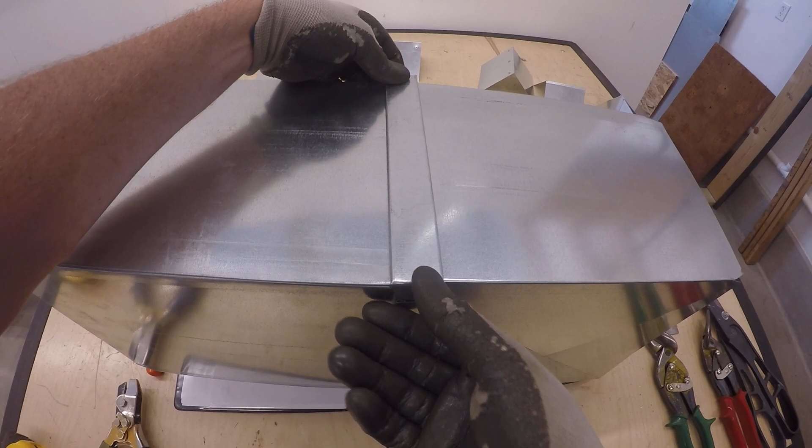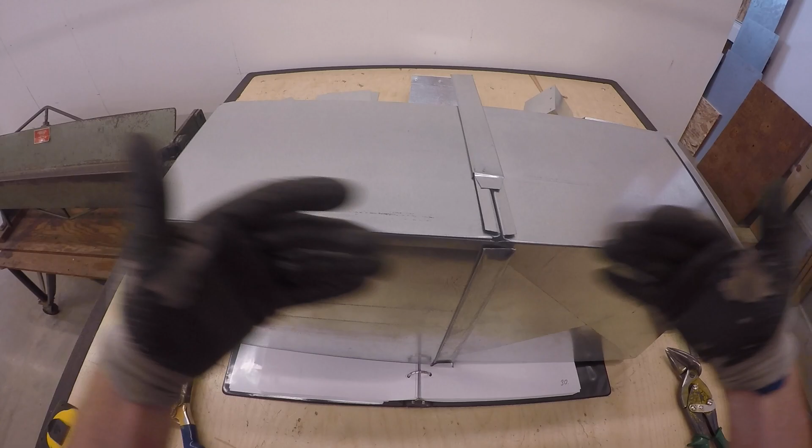So if you can see that back there, we've got an 8-inch tall duct and a drive cleat that forms the two edges and connects and locks them together. If I slide it over and pull it apart, we can bend these corners up and slide that down, provided it doesn't get hooked by anything, and it just slides off on the other end. If I spin it around, the two bent edges of the two pieces of duct connect with our S cleat here as well. So this part I'm moving is what we're going to be fabricating up today.

So let's get on with it. Here we go. Job 7 is building the drive cleat. It says study the instructions per plate 1 on the next page.

We're going to make our drives to fit an 8-inch long duct, and it also states that the drives should be at least 1.5 inches longer than the height of the duct. So if it's an 8, we need to make it 9.5 inches long, and that's what we've got lined up for the next piece.

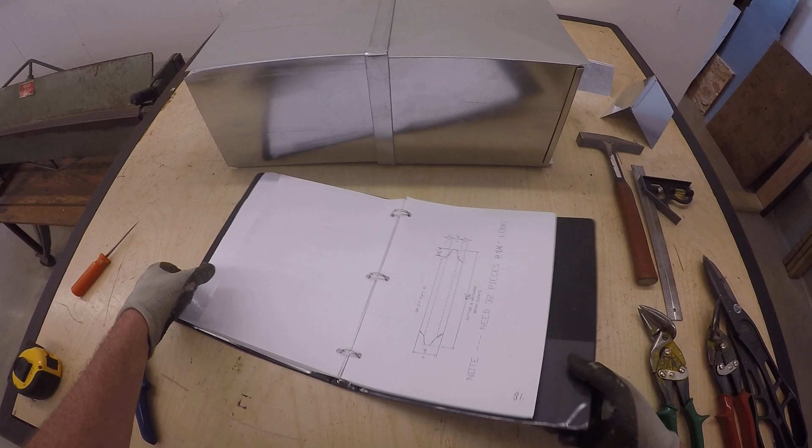Looking at the next page, you can see they've got the main portion or the main plan for the drive cleat laid out here. A lot of this part can be done using just a notcher and a scribe, so we're going to do that first.

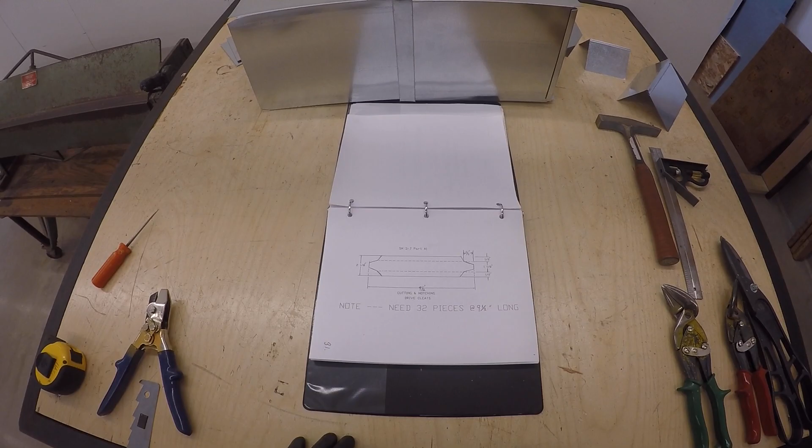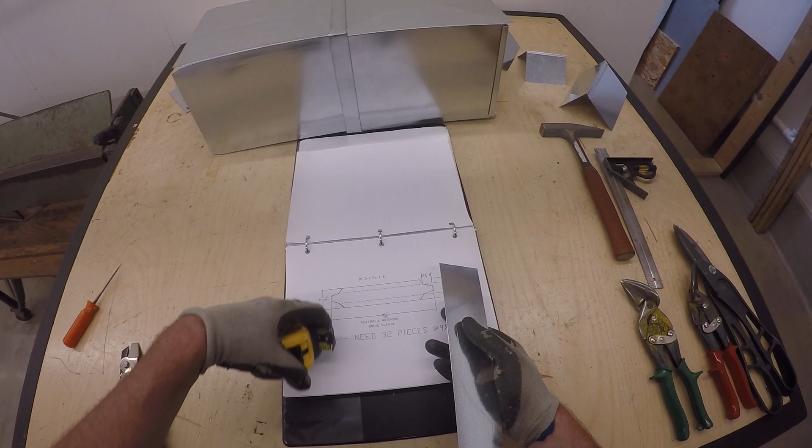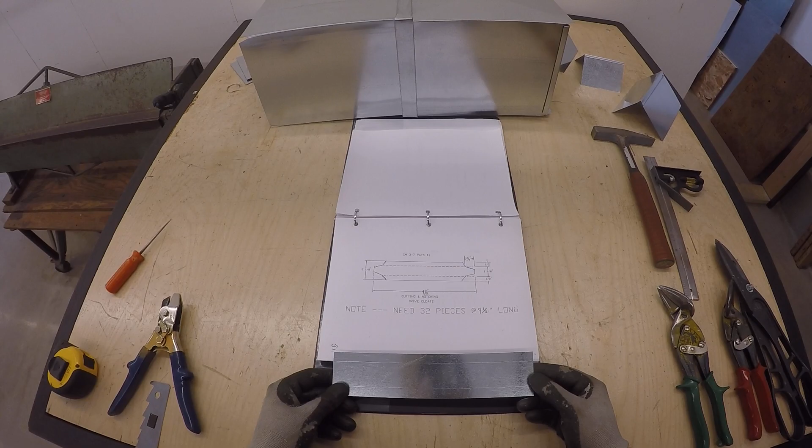First things first, we've got to get our part. We measured the length at 9.5 inches and 2.125 inches in width to complete this piece. I only cut one — for the entire project, you need at least 32 pieces, 9.5 inches long, but they can also be made in the machine or purchased down the road. So we're just starting with one for now.

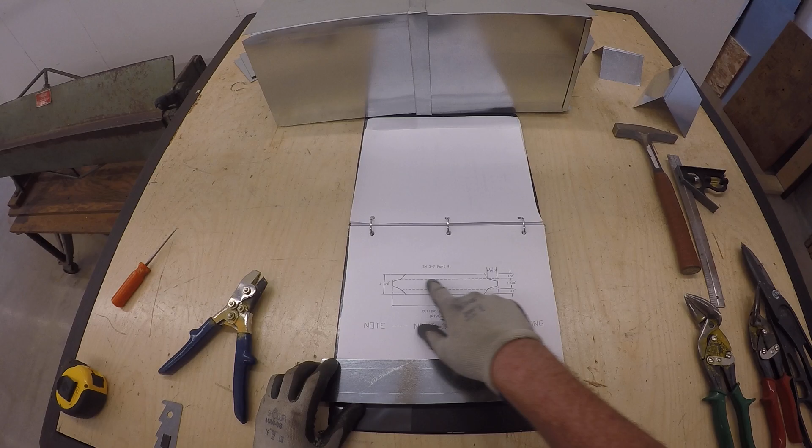To complete this, looking at our plans, we need 1/2 inch marks to indicate where the bend line has to be, which we'll do in the apron brake. Then it wants a notch 3/4 inch in and 1/2 inch down at those center points on all 4 corners. So let's do that now.

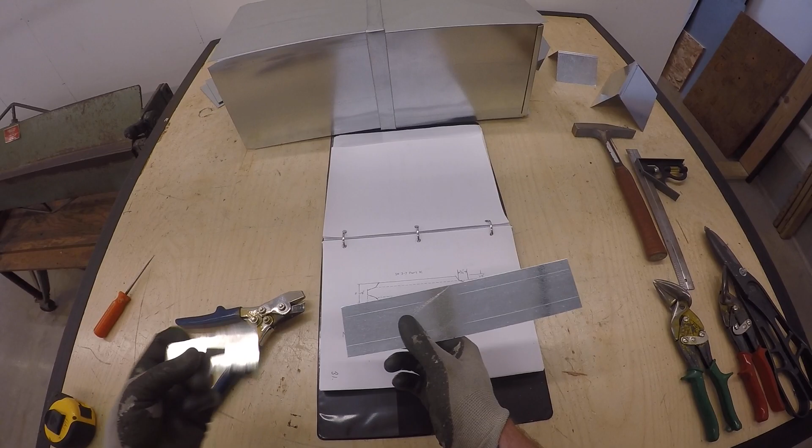So I've already marked the 1/2 inch width on the table using the scribe, just running it along the edges on both sides to come up with that using that tool.

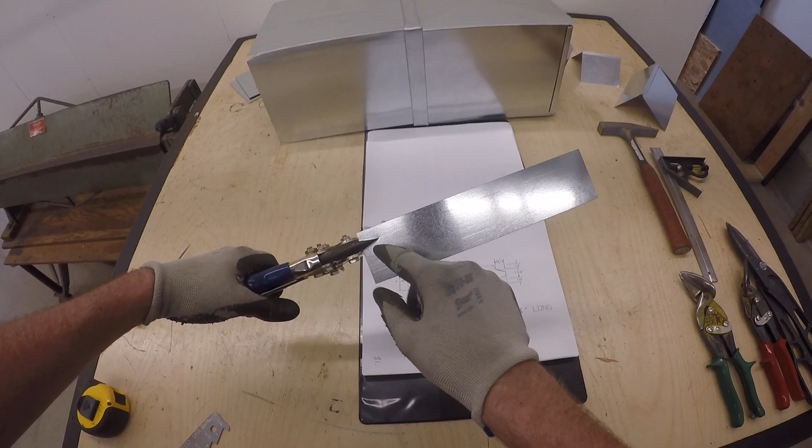Here I have my 3/4 inch notcher. This one's by Malco — there are others, Hillmore's got them, and everybody's got them. You just put it right on your 1/2 inch mark with the center of the tip, squeeze that off, and it pops out that section.

We'll do the same again on the other 1/2 inch mark, then flip this piece over and do it with the 4th one as well, just like that.

Now we've got a piece that looks similar to that — we've got our starting function. All we have to do now is knock off the edges. Some people prefer more of an angle or less of an angle, depending on how you look at it, on how they cut that off so it connects to their bent drive on the other piece of duct. It really doesn't matter to me — I can fabricate them in the field as well if needed.

If I go something like this, I think that would be a little bit short, so I just use my notcher and bottom it out on both corners and pop that out. Some people like them steeper, some people like them less — makes no difference to me, since we'll be taping the joints when we're done for sealing purposes, as long as they stay in place. So we just go around all 4 corners like that and notch them out.

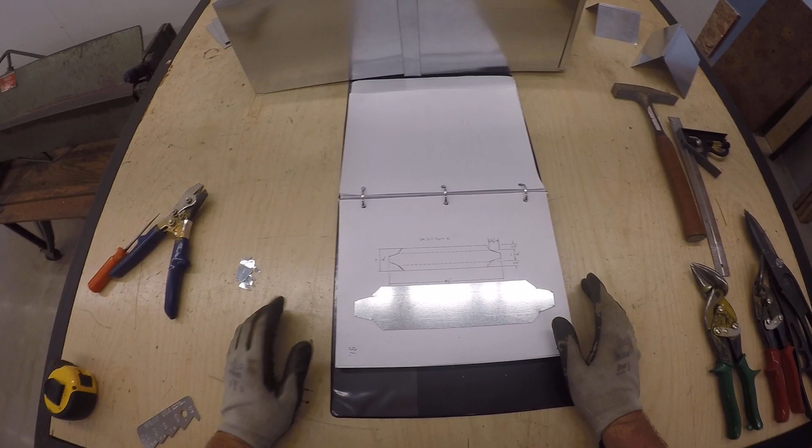It kind of makes a mess, so try to keep it all cleaned up. So if we look at our plan, we now have everything cut out and notched as it should be. Let's go on to the next page and get into the bending portion of this project.

Basically what they're showing here is an exploded view of the edge — we're going to take the 1/2 inch edge and roll that over in our apron brake, and we should have approximately 1 5/8 remaining. Let me slide this out so we can read it. So if I set it right on the inch, it should come out to 1 5/8, and it does. So that works out.

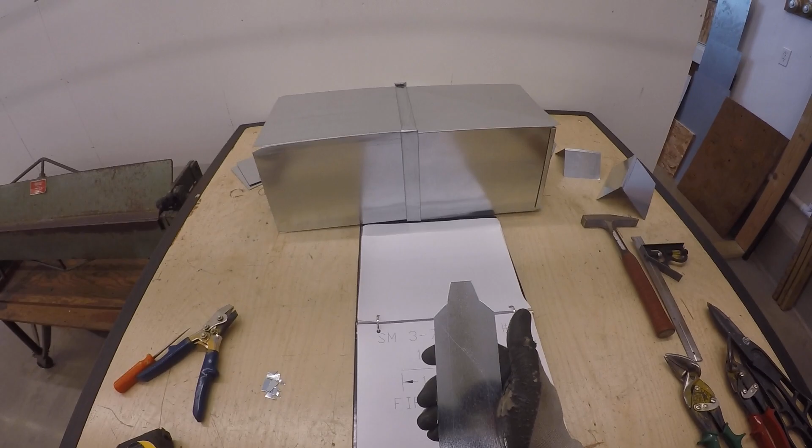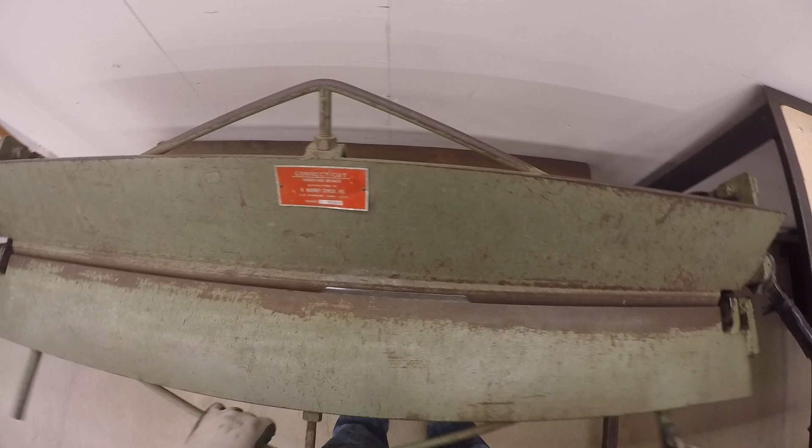Let's go ahead and go over to the apron brake and put that first bend on it. If you recall, in the previous project I had some issues with that Pittsburgh seam not being tightened up, so I did adjust it. It's better, not perfect yet. I found out this brake has had some fabrication done to it, and there's no adjustment left on the right side because they happened to weld it, unfortunately. So currently we're close, but it needs to be closed down, not 100% tight.

It has to have enough room in there to slide another piece of sheet metal inside of it. So on that second bend, after we bend that, I'll slide it back down here on the edge. We're not going to pull that 100% tight, just bring it down so it's within about an 1/8 inch or a 1/16 of an inch from being closed there, maybe a little further yet.

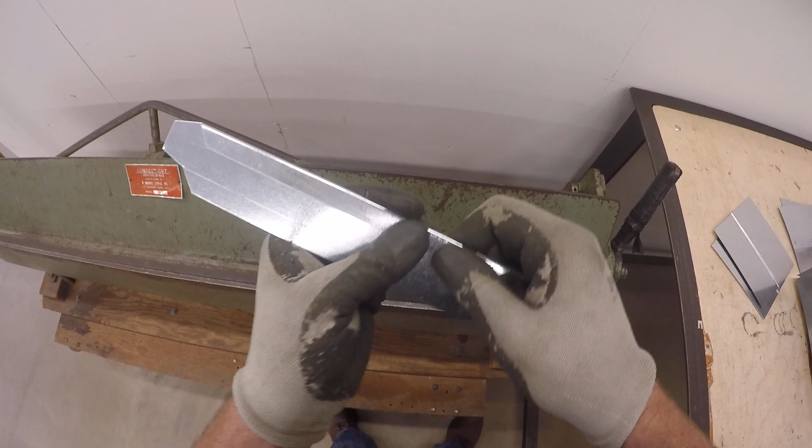And that's not too bad, that's pretty decent. The brake can use some help yet on that. Maybe this end will be a little bit better. Sorry about that, and that kind of made that nicer.

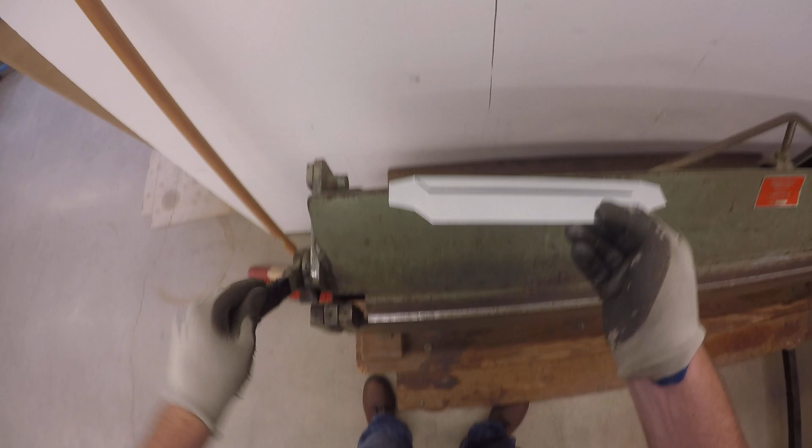So now let's go back to our plan so you're following along here. There's your exploded view with that first bend. Let's go on to the next page. It shows the second bend, and we're basically going to perform the same result in the other direction with the 1 1/8 left over. So let's go ahead and do that now.

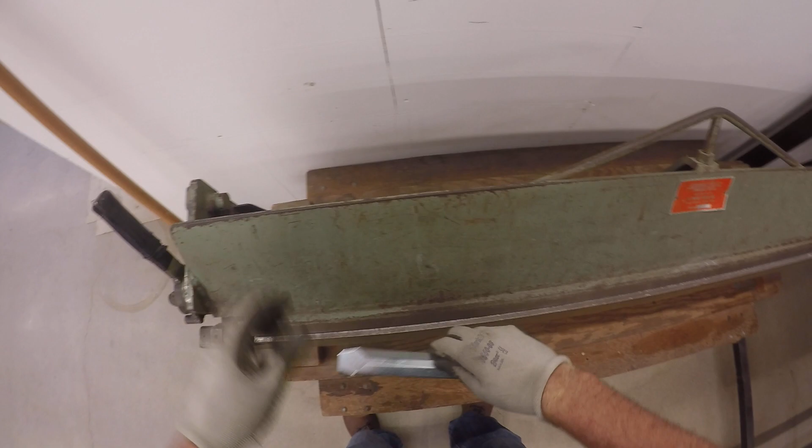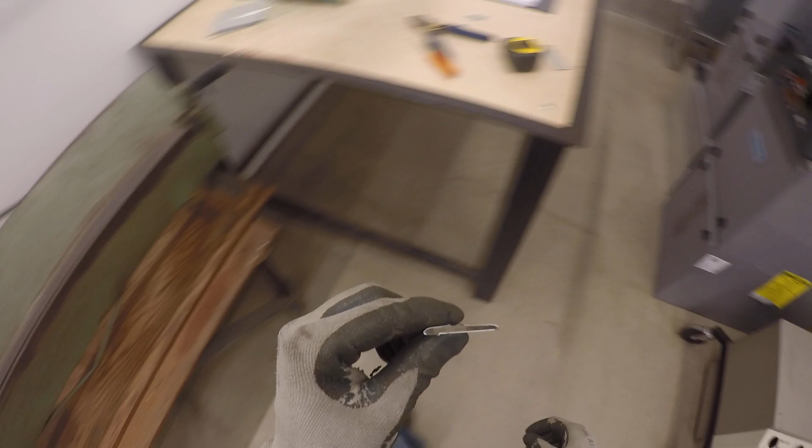So slipping it into the brake right on our 1/2 inch mark, lining that up on both edges, and we're going to pull that up just like we did before, up to the stop. Again, it looks like that, and we've got to finish closing that down to make a match. We're not going to close it tight again because we need to get that piece of metal inside of there. So let's go back to our project, and it should measure now our 1/2 inch in here.

And these are some approximate numbers, 1/2 inch here as well. Some people like to have them a little bit wider than that, but approximately with an 1/8 inch gap in between is pretty ideal. And then 1 1/8 on the outside, which actually came right out pretty decent with that. So that'd be a decent drive cleat.

Some manufacturers will actually have a punch that will make this outside edge round. Some people won't cut it at all. I do like to see them cut, so if you have to take it apart, it's a little easier to straighten that out. But anyway, moving on with that.

So that's your second bend and the end result taken care of there. And now they're going to show you how the connection is made.

I'm going to demonstrate on this particular piece here of the 1/2 of the duct. You'll see that we took a bar brake and we have already bent a 90-degree, and then the next duct is going to slide into here with an S-clip on it, and the other piece will have this exact same bend on it. So we're going to take the edges here and hook that, and it'll actually slide down over top the two pieces of duct on each side, and then we'll bend the top and bottom over to lock them in place. So it'll look like this one here.

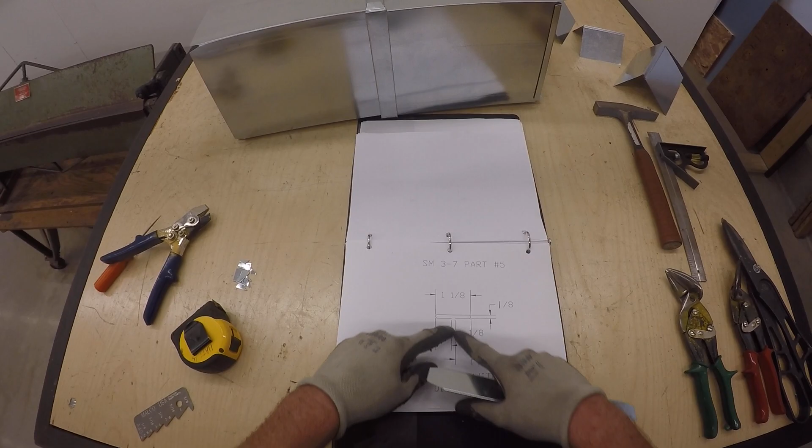And I believe it does give you one more plan with some more dimensions that go along with that for that drive cleat as well. So the 1 1/8 width, approximately an 1/8 inch tall, 1/8 inch gap, and the 1/2 inch sections for that.

There's your three-dimensional view of the project of the two pieces of duct just laying flat with those 1/2 inch bends on the duct, and then your drive cleats sliding over them. And that will wrap up that project.